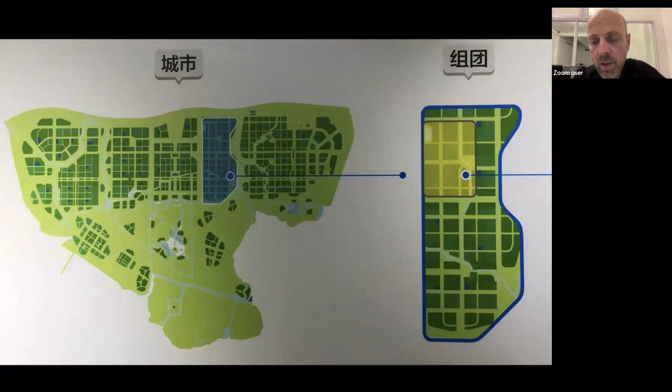And even though the context is so unique, the plans are not. This is a diagram of the master plan, and to me, it strikes me that it is similar to any modernist city we've seen over the last 80 to 100 years. A grid city with regular large roads in all directions, sometimes even 6 lanes.

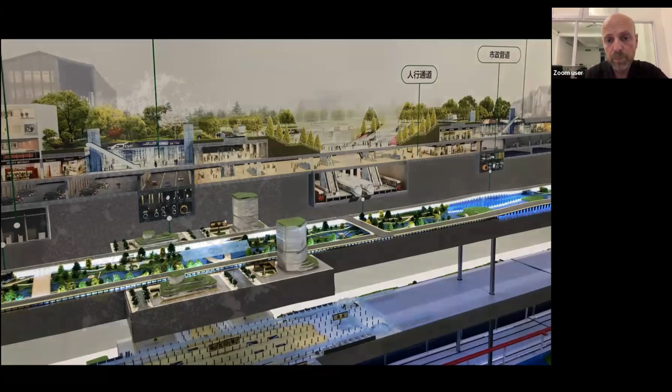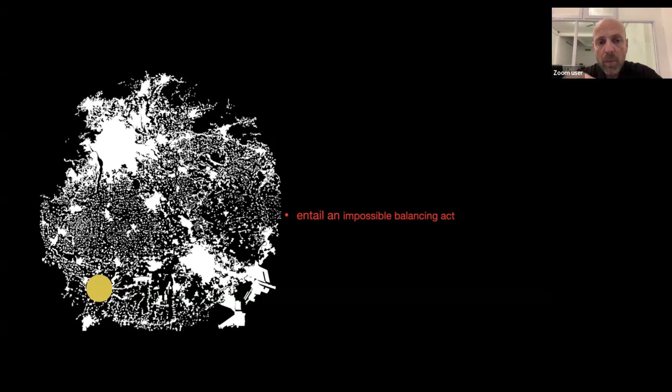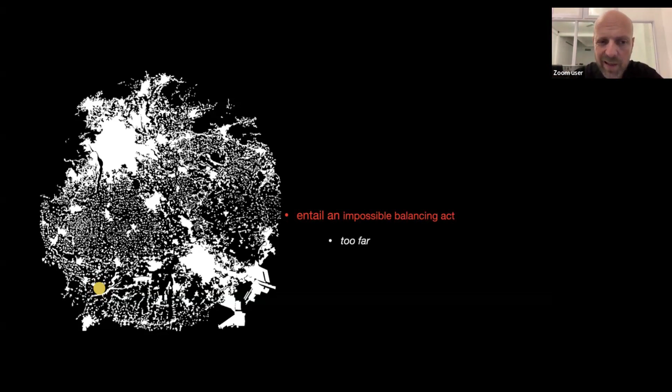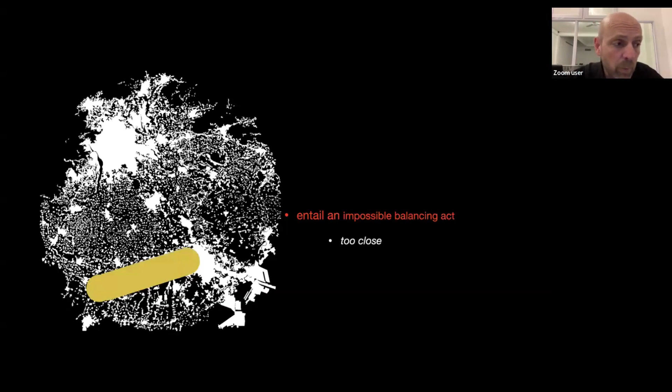If we go back and look at that dot and how it sits between these two mega cities, Beijing and Tianjin, it's almost impossible for us as planners to position that new dot, that new project, in a meaningful way. Either you're too far away from an existing economy, from an existing urban core, and your city is kind of withering away, which is currently the situation with Xiong'an. It's kind of lingering. Or you are too close to a mega city or a strong economic core, and invariably you're too successful, and your new town will grow towards that core and kind of blur with it.

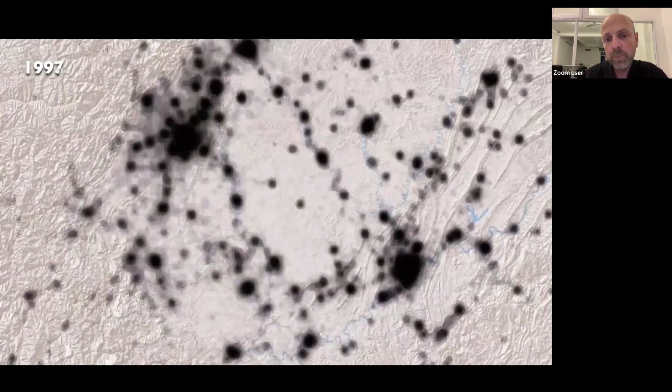And this is not theory, this is very much actual practice. If we look at two cities from the 90s, Chongqing and Chengdu, and we glide through their development over the last 20 years, we see that despite all the planning, despite all the very detailed rubber-stamped, officially designed master plans, they have ignored all those schemes and followed their own urban gravity to grow towards each other. In my terminology, this is market-driven unintentional development, or MUD. That means we don't really have the means to control our own urban products.

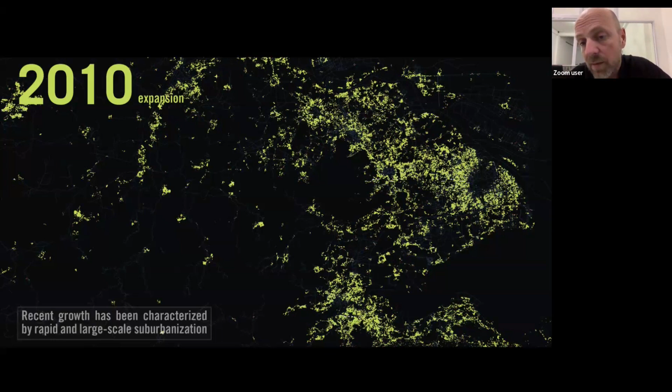In China, while these projects are being realized, suburbia unfolded. This is all the new urban tissue that was created, planned in those short 10 years. You can see that, again, there's no real coherence, there's no real structure to this, there's no master plan. And the same goes for other cities.

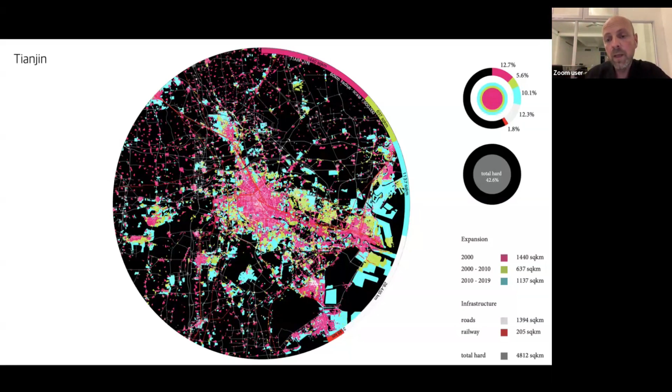We can quickly glide through them. This is Tianjin, where pink is in 2000, yellow is in 2010, the footprint, and blue is the new footprint by 2020. So the process changes, but exurbanization or suburbanization or fragments kind of launched to the far reaches of this urban system continue to grow. The same for Beijing, the same for Wuhan, very much happening between 2010 and 2020, all in blue.

So if we want to control that, or if we want to outplan that process, there's a number of standard models at our disposal. And the new town is scenario one. I hope that these diagrams indicate it wouldn't be particularly effective. The new town planning, say 4 dots that absorb the amount of growth that is projected, wouldn't stop the expansion of the existing core. Maybe somewhat more effective is a sort of a ring close to the center with limited driving, limited infrastructure. Better yet, along that logic, is a sort of offset, a perimeter growth that would take the existing footprint and just offset it a little bit all along its length.

In reality, none of these three scenarios would unfold. What would happen most likely is what we saw in the previous diagrams, that the city kind of expands along its own accord. So we don't know how to plan them, and we don't really know what is a good city.

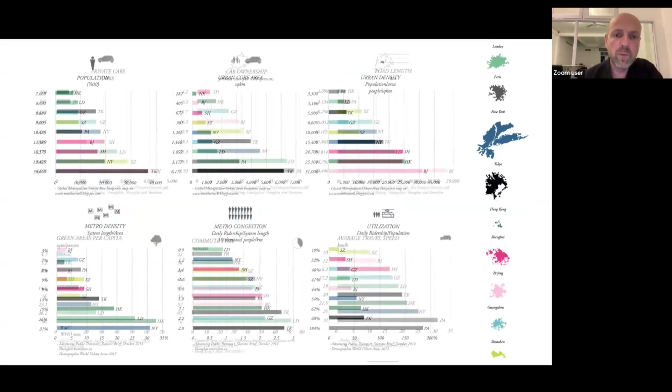I'm biased, but I do really like Hong Kong. Weirdly enough, the cities that I also really like are scoring very poorly in this diagram. For instance, Beijing, my favorite city.

It's also a terrible urban system. So performance and experience are at odds with one another. We can make a system that performs well, but it might not be the place where you want to live or work, and vice versa.

So even though planners don't know what is a good city or how to design and plan it, increasingly it seems that leaders around the world do think they know how it's done.

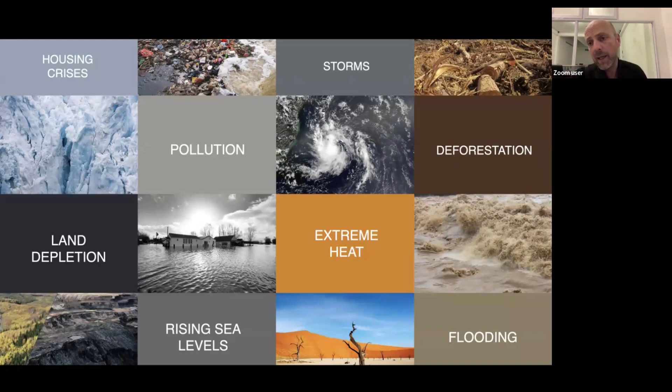Maybe that green space will, as we start designing, deter us from making a compact city. For now, we are still following the big dream of all these eco-cities, which somehow carry the burden to deal with all these global threats - global warming, deforestation, flooding, etc., but also just acute housing crises.

These types of global urgencies have introduced an excuse for many planners and policymakers to present these concept cities that don't really have the science to back their design. In fact, I would argue...

...that the world has changed so much that our initial planning models of cities with a center versus suburb do not thrive in a context that doesn't have much centrality. In short, the theories we rely on as planners fail within the world as it is now emerging.

And yet, this urbanism of urgency - these big threatening immediacies that we need to respond to - allow us to make increasingly ridiculous projects. The Line is a great example.

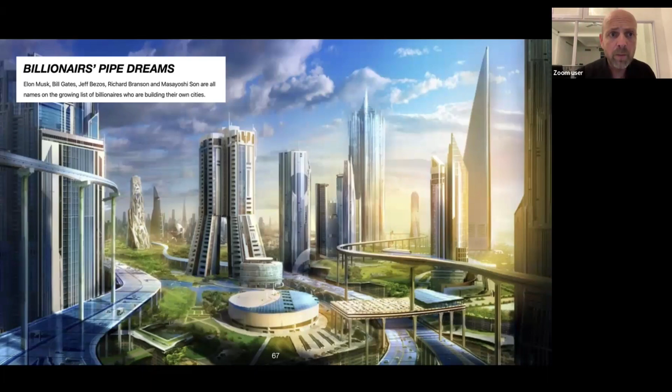But it seems that every billionaire and his uncle wants their own new eco-city, new planned-from-scratch city: Richard Branson, Bezos, Bill Gates, Elon Musk. It's become the next big thing.

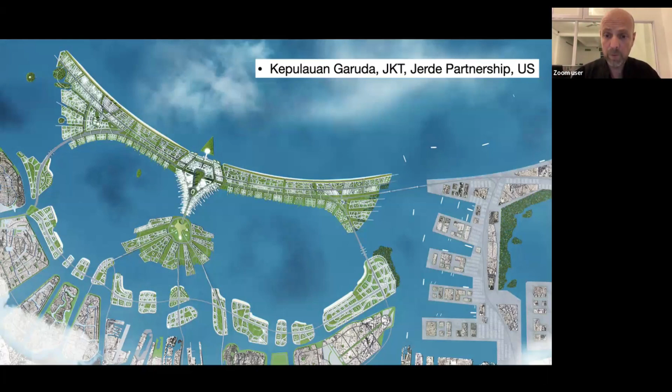Also locally here, we've had our share of attempts at planned-from-scratch new towns. This, I must admit, is also not just an American company, but an American-Dutch partnership.

We must admit to ourselves that the new town can be understood as simply being a blueprint projected on a greenfield. In the case of McKinsey, if you're building these hermetic, resilient environments, you really have to wonder, are you reaching...

...the people who are in need of rescuing the most? So the theory fails us, or rather this theory is no longer in touch with reality.

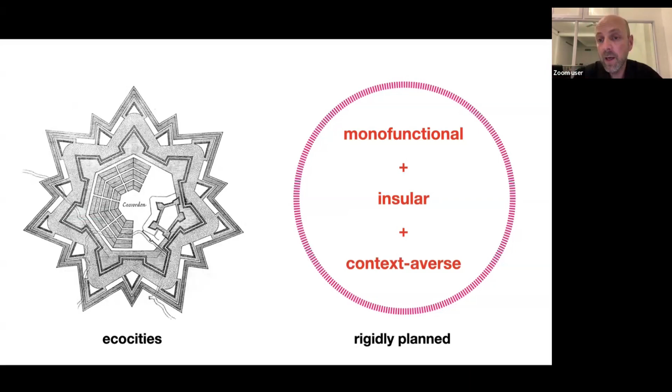They're kind of more like these, in this case on the left here, Renaissance vestiges that did one thing really well: protect us against the modern enemy of global exigencies, global warming, flooding, etc. Ultimately, they remain monofunctional. They do one thing pretty well. They're inward looking rather than outward looking. They're context-averse and rigid.

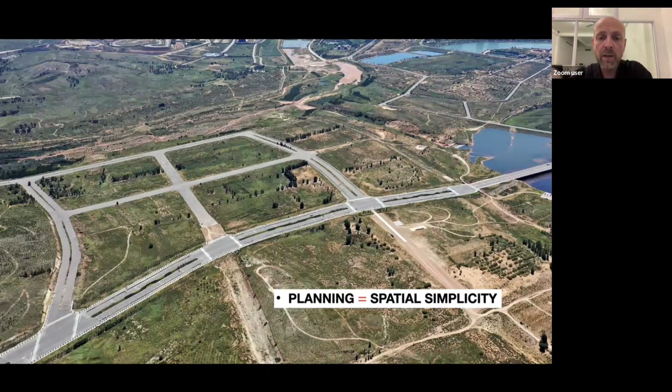And this is not theory. This is very much the way these cities are planned and built. This is near Ordos in the north of China, where you see how the grid is rolled out in big quadrants and then filled in with blocks. This is an efficient way of attracting funding from the central government, and it's an efficient way of attracting funding from local investors to build a project, if the road is already there. But it installs within the urban fabric an extreme spatial simplicity, as you can see.

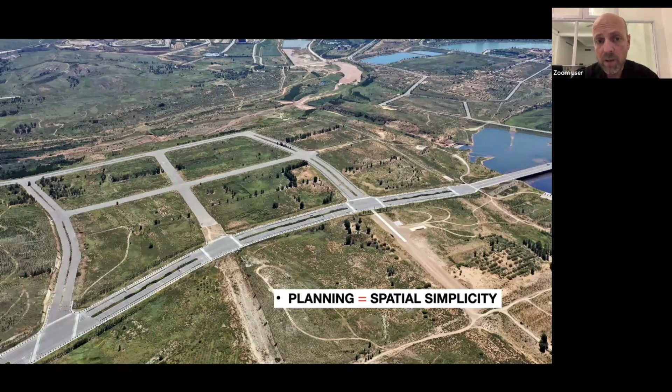In that type of framework, the smart city that you're designing, the eco-city that you're designing is really disguising an old urbanism. It is really still just big roads connecting in a grid.

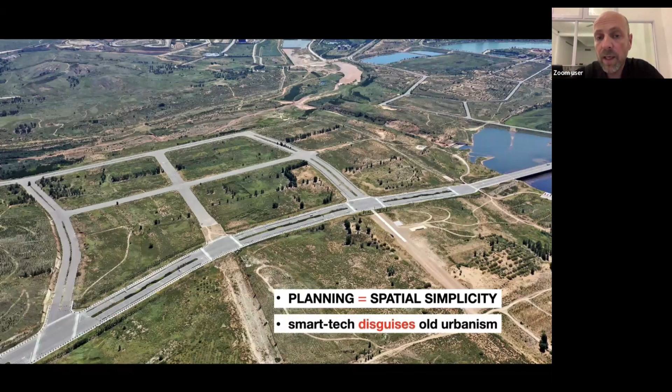So that's my little section A: no new cities. There are plenty more arguments to avoid them, but let's get to Nusantara.

I mentioned I don't think Nusantara is that blueprint projected on the greenfield. The first step is the greenfield. That's fairly obvious.

So you're projecting onto an empty, at least in terms of population density, an empty slate. Is that correct? Yes, but there are certain local realities. It's a territory with its own hydrology. In this case, on the right, you see all the different languages that are spoken. So there is a cultural context as well. So it's not a tabula rasa. In fact, it's not even a green field.

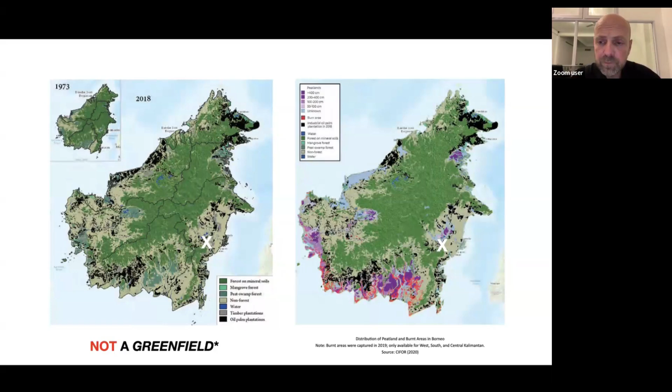This image, many of you will know it, is revealing the kind of gradual erosion of the natural landscape since, in this case, 1973 to today. The current context where Nusantara is built is not a tropical, diverse rainforest. It is actually what here is marked as non-forest, a monocrop of oil palm plantations and acacia trees. So it's not a green field because there is no forest.

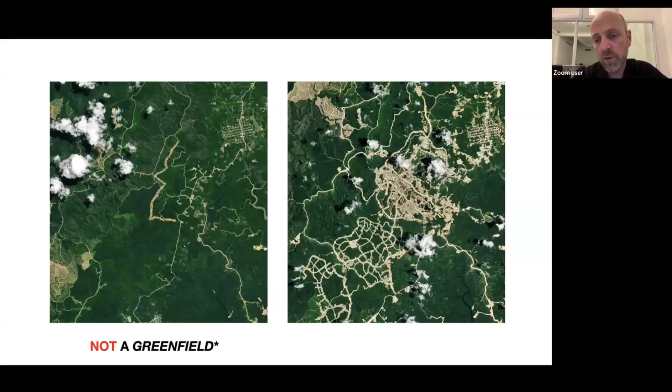It's also not a green field or tabula rasa because, most importantly, the phase 1-4 administrative center of Nusantara is already built. These are the roads that have been constructed. And Pak Sofian of Urban Plus will talk about this in the pre-last session in this series. So if you have an existing core, by definition, it cannot be a greenfield. We are planning against something that exists, building on top or from something that is already constructed.

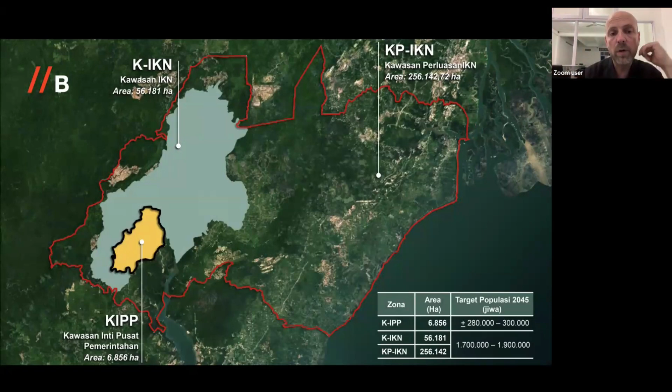That's distinctly more difficult. I would argue that the main reason it's not a blueprint is that our mission and the official mission for the future of IKN is to seed this idea of a forest city. In other words, for the next 20 years, we're going to expand, grow, and evolve from this yellow core where phase 1 is being constructed to something that occurs within this red outline, within this red border. Where is to be discussed. The goal, 2 million over 20 years, will not happen at once, will very much be a gradual process.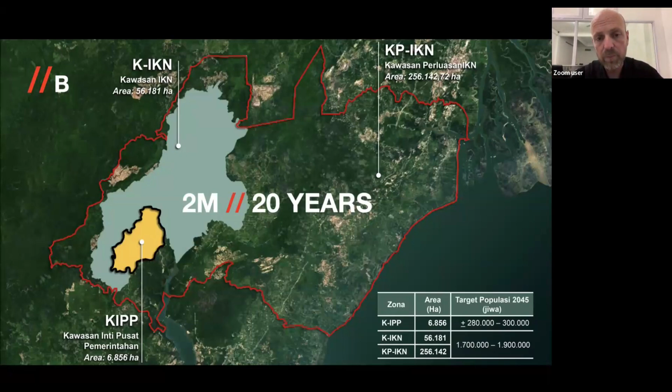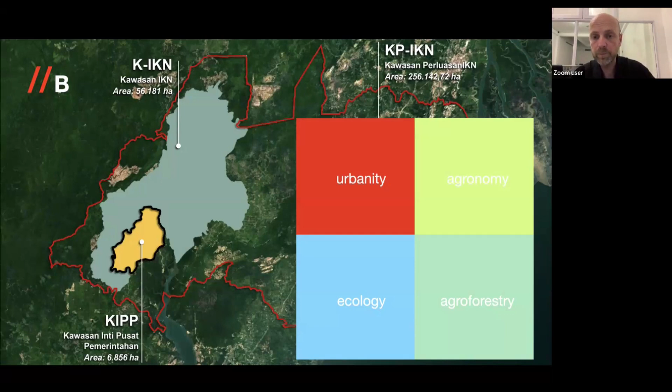And the program or the land use is also not of a usual blueprint city. In this very simplistic diagram, I try to indicate it is some sort of mixture between urban and non-urban, between urban, nature, and agronomy or agroforestry, some combination of red, green, and blue. This diagram is slightly more accurate. It is less prescriptive in a box. We're probably not going to see any boxes.

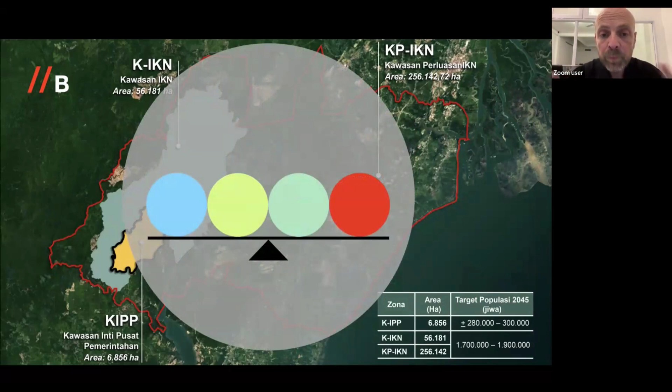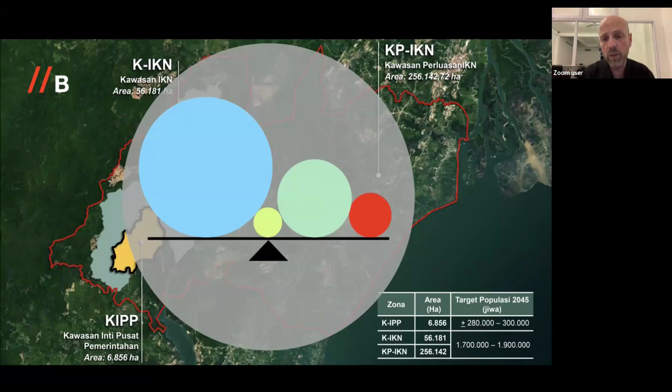It suggests that we can and we must acknowledge this entire area and somehow strategize how the correlations of these programs should occur and what their exact proportions will be. What we do know is that they happen simultaneously and that they have to have some sort of balance between them. So in that sense, it is a traditional city, not a planned from scratch eco-city. It is a city that must fulfill traditional needs.

It has to have a critical mass, a capacity to house. It has to ensure safety, basically resilience. It has to somehow incorporate its future resources in food, energy, water, building materials, etc., medicine. And ultimately, it has to be a place of social, cultural, and economic exchange. That's your basic definition of a city.

And this would be very difficult, but the context has changed quite dramatically. Unlike Chinese eco-cities, there is no economic pressure cooker anymore. It's going to be slow. It is not primarily funded by global investments, so it can be and must be somehow bottom up. It can be projected on a distant locale because the initial inhabitants will be students and officials, the two groups that allow themselves to be relocated with not too much impunity.

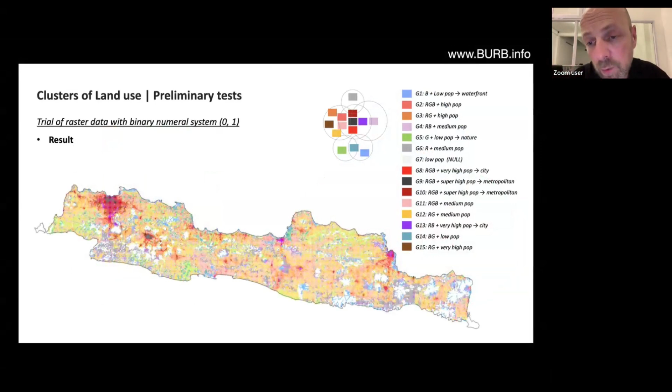But the beauty is, if we reduce that very complex environment, let's say the suburban landscape of Java, to only 3 colors, we can begin to grasp what's going on, and then we begin to strategize for larger areas. So using this tool, and I want to stress that you don't need GIS to do this. You can also still do it, as I used to my whole career, through manual labor and just mapping it the old-fashioned way. You can understand these systems and reduce them to these, let's say, cocktails of different programs.

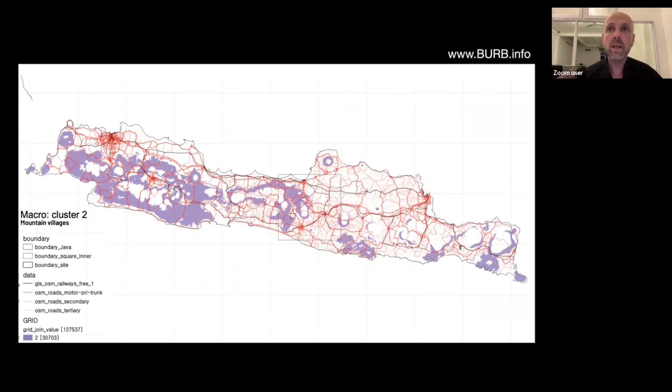If you have such a reduced set of landscape typologies, your future strategy can be implemented across very large areas. So suddenly, you have the means to work bottom up, where traditionally all our planning is top down, is centralized, is a blueprint. Now we can say, for instance, in this blue zone or this light gray zone or this orange zone, the spatial logics are probably similar. So if we have a solution that we develop locally, it could be replicated across this orange zone.

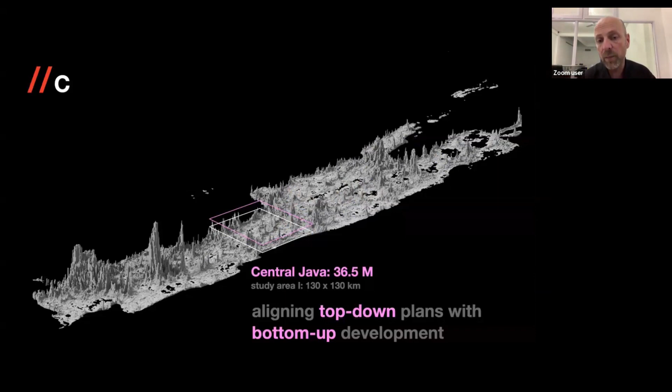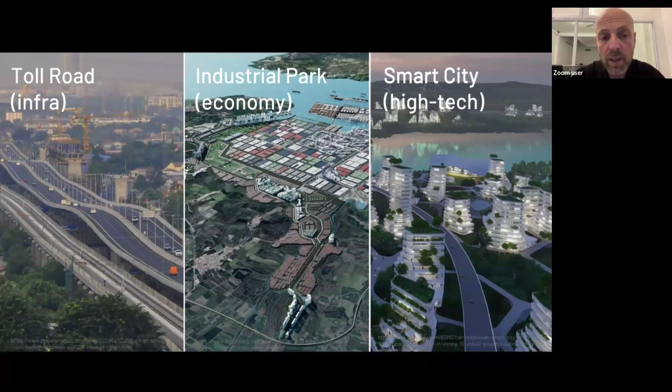Here you see some other ones for Java. Now we've applied that logic to Central Java. So here, the reality of top-down planning meeting bottom-up grassroots and informal development is very real and very tangible. This is the top-down reality. We need airports and seaports. We need toll roads to a certain degree. We need logistics centers, but they are superimposed onto a landscape that is very active itself, that has its own micro activities that follow an entirely different logic.

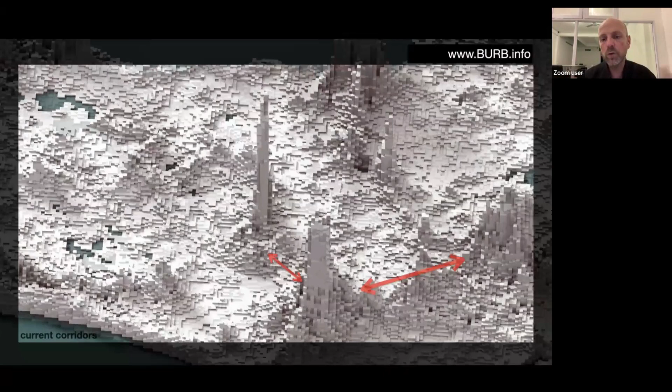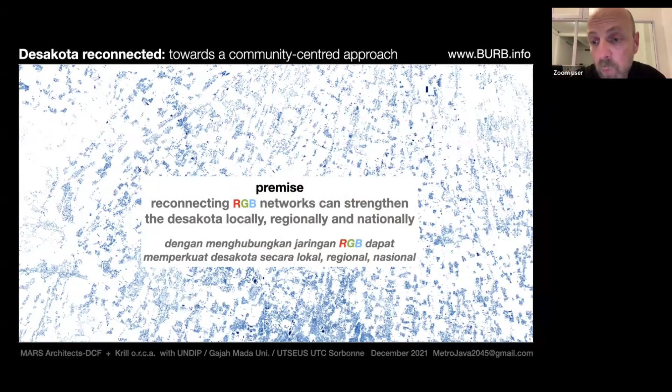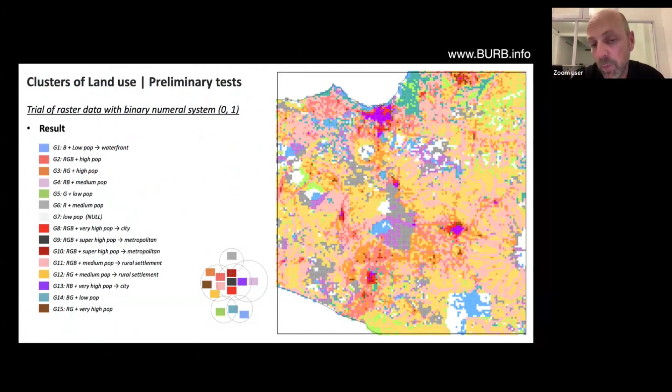So suddenly, these density spikes begin to respond to each other, grow towards each other, respond to new top-down planned items such as the new airport or the Borobudur as a new destination. So my premise is that using land use, we can make sense of that process and we can even guide that process. This is Central Java with our cluster map analyzed for a great number of different cocktails that we then reduce to only 15.

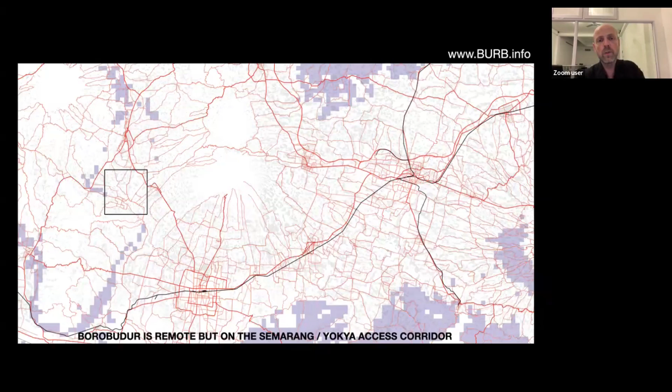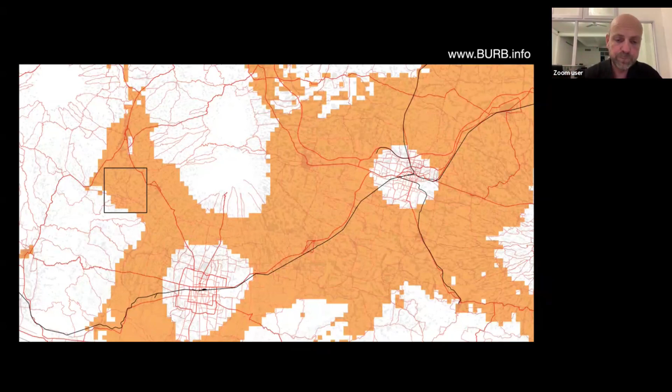Zooming in on one site here in that box, the Borobudur, we can see that if we had a spatial strategy for that one envelope, we could replicate it across this orange area because our analysis suggests that the land use is similar, the land systems are similar. So we've done that. And in my first case study, to back up my claim, I'd like to share this mapping of the Borobudur area. In the little black box here, the dot is the Borobudur. And we did extensive mapping, but I'll show only a few.

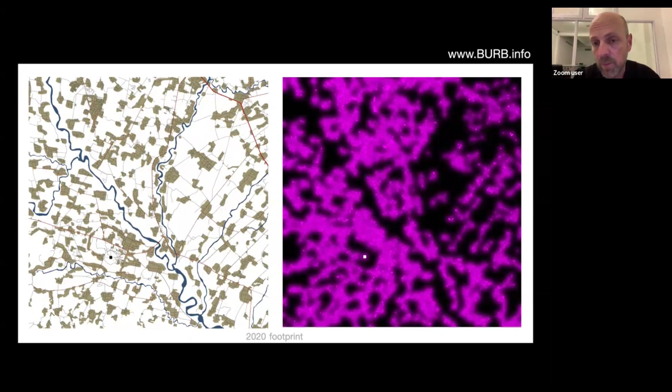We see that in this seemingly universal landscape, there are certain hierarchies. There are places that are probably growing faster than others. There are places that are more accessible and less accessible, for instance, either by car or by foot. So the traditional rural versus urban dichotomy that we as traditional planners used to rely on can be traced back even in this very intricate, seemingly universal system. The urban, accessible by car, the rural, by foot.

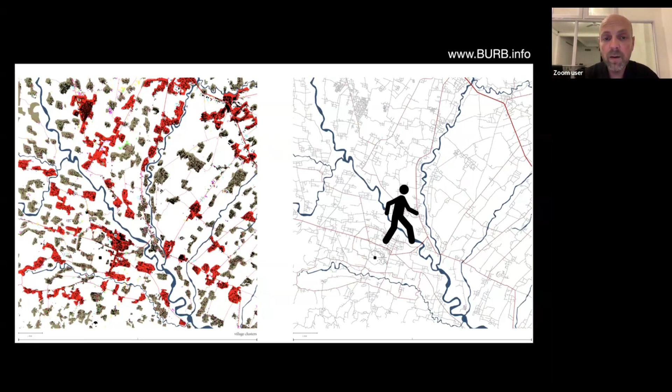According to that logic, we could begin to strategize a development scheme. In this case, we have red corridors where villages that are accessible by car become more urban and embrace urban activity and maybe industrialization, whereas the green bubbles that are accessible for pedestrians, bikes and scooters remain protected, remain local, remain green, and still are able to tap into those red zones. Here you see one of them. This is an actual village with its green corridors that are revived in order to allow people to walk from one village to the next without having to use, for instance, a highway.

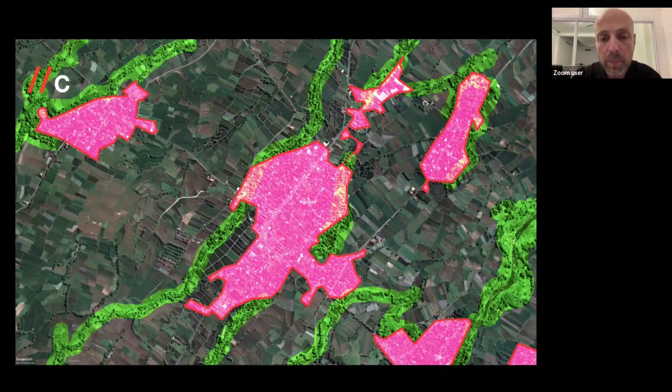So suddenly, what seemed to be a vast and almost incomprehensible fabric becomes much more human, more local, more understandable.

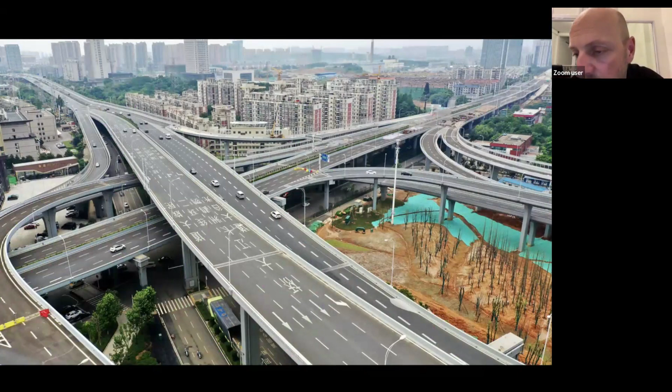Now, I hear you think, yeah, that's great, but new towns are the product of developers, and developers like cars because people like cars, and maybe this is all only viable in some rural context. Maybe that's a fair argument. I would like to suggest there are some alternatives.

But if we want to rid ourselves of the car, and in the second talk of this month, Lior and Barend Koolhaas will tap into urban mobility, we see that if we radically rethink the master plan of the city and introduce this evolutionary process, we could probably avoid our dependency on these very road-centered systems.

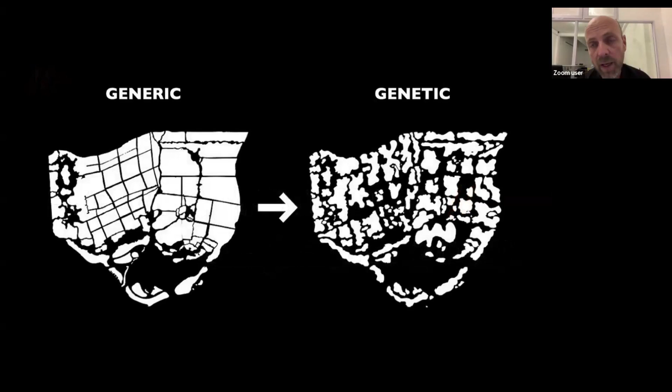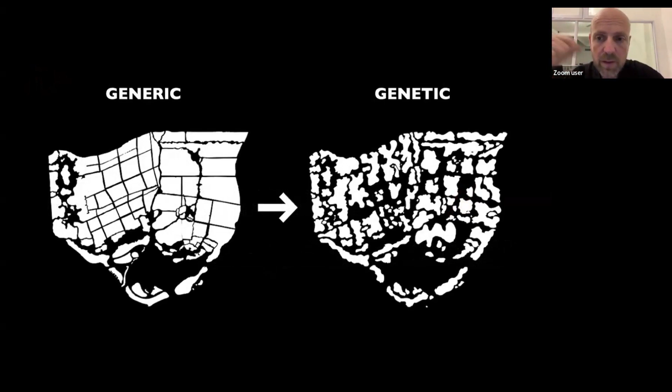So we were invited to design an alternative for Xiong'an, the city I showed you in the beginning next to Beijing, Tianjin. The original map on the left here, very traditional, very road-oriented, and yet supposedly a green city. We suggested that we couldn't really take that map and replace it for another map that we, as a single team, would then define top-down and say, that's our new ecosystem.

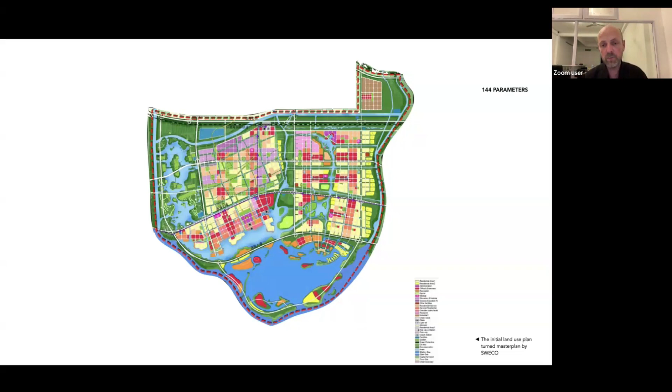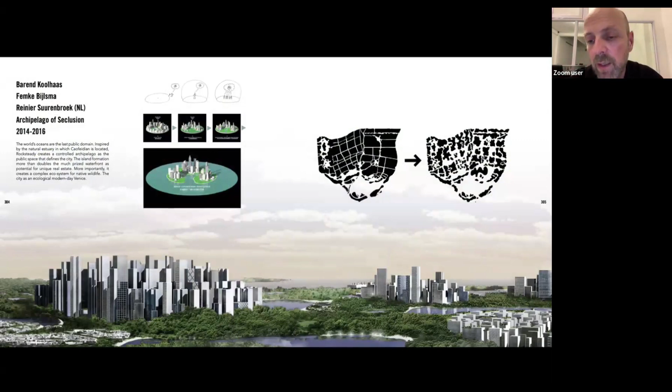We suggested that instead, we should redesign the planning process itself. So to install a sense of evolution, we install it within the planning process. To do that, we invited 9 other companies, very formidable ones, including Urbanus, BAU, ZUS from Holland, MAD from China, etc. Instead of asking them to each design one corner of that future city, as is common practice, we suggested they should design one after the other, passing the file along in the computer in 3D from one office after a few weeks of working on it to the next, etc.

So they all had very different ideas of what is an eco-city. That in itself is already kind of mind-boggling. There is no singular understanding. There is a plethora of ideas and aspirations of what the future of the eco-city should or could be. In this case, ZUS introduces a beautiful kind of landscape urbanism type solution of dikes and houses on those dikes, and even floating pontoons, etc.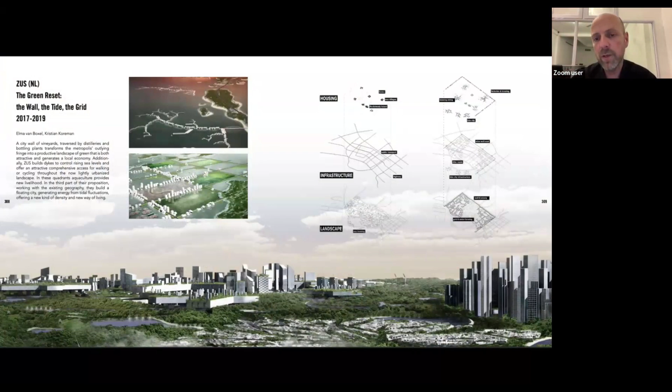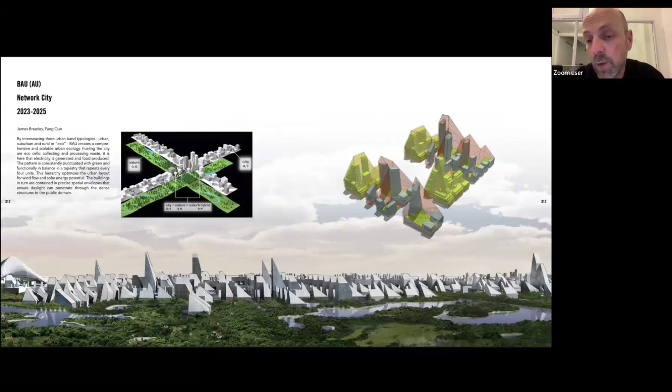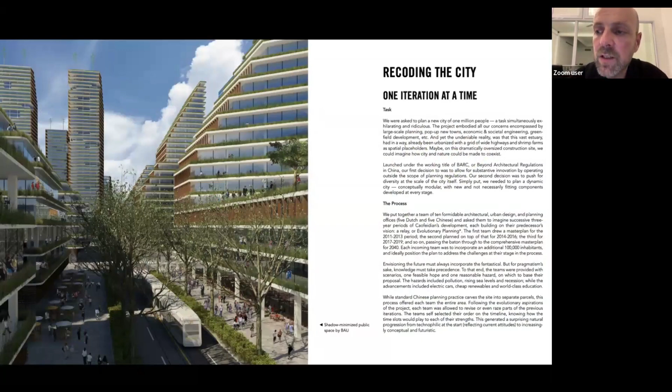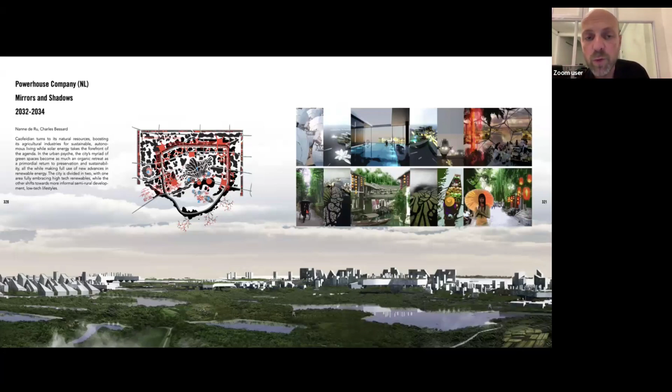So we have a range of designers working on top of each other, even deleting previous solutions or parts of designed areas, in a way replicating the growth of a real city, simulating the evolution of a city. That is a type of inherent complexity that you cannot design as a single team, not even the best in the world. So what you get is a number of really shifting directions of this evolving eco-city of Caofeidian as it in the computer grows from 2011 in 3-year increments to 2040.

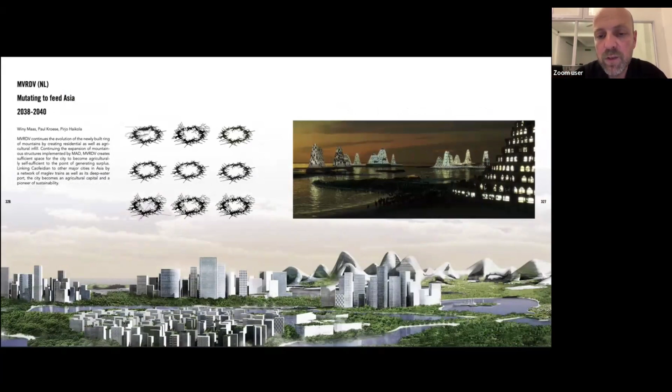In this case, towards the end, Ma Yansong, MAD, feels there is enough economic momentum to do a grand gesture, which then is undone by the final participant also taking part in this lecture series, MVRDV, who suggested, well, we need to be sustainable, we need to recycle that space and occupy those buildings. So what you see is a very rapid transition here. I'll click through it team by team.

It starts simple, then landscape urbanism kicks in, infrastructure, walking and biking come into play, new forms of housing, new neighborhoods that are organically growing, an entirely new energy system, a new center, CBD, if you will, and ultimately a city that, even though it's utopian, has enough to teach us about which of these ideas are in the future maybe desirable and maybe not. It allows us to make our mistakes that in the real city cannot be made because the city can't be undone. The city is not an empirical product.

I think this is probably my closing case study, or maybe pre-closing. I have a simple definition for myself what planning should entail and should be about. It's connecting people, connecting systems, and connecting space. That's it for me. In the case of the master plan for Mumbai, we came to discover that sometimes that is easier said than done, because the city you're dealing with has a hidden city within.

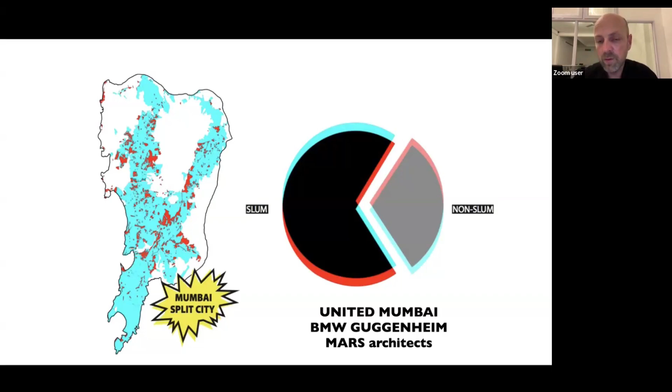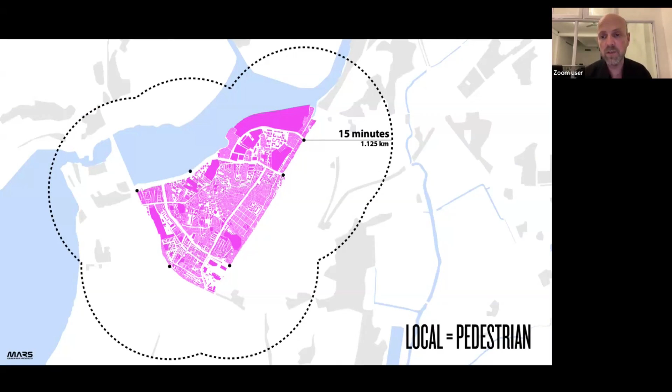So what do we do in that context in terms of reconnecting people, places, and systems? If we look at the largest of those informal settlements, and the most famous one, Dharavi, it's kind of locked in by infrastructure. Train tracks, roads, water, sewage. And yet, all that infrastructure makes these people have less access to the rest of the city instead of more.

It's so bad that it impedes their daily lives. There is a sort of time scarcity. They can't achieve all the things they need to do within one day because there's so much to traverse, so many tracks and pipelines and infrastructure to traverse to get to their destination. At the same time, all those informal settlements seem to impede on the regular formal city and their transportation needs.

We have a very rich, diverse ecosystem, the city, which is in many ways similar to the diverse, rich ecosystem of the forest we aim to achieve. And within that is this urban, scattered capital, an informal capital. So what we proposed in this scenario is rather than having a split city, we would have a twin city.

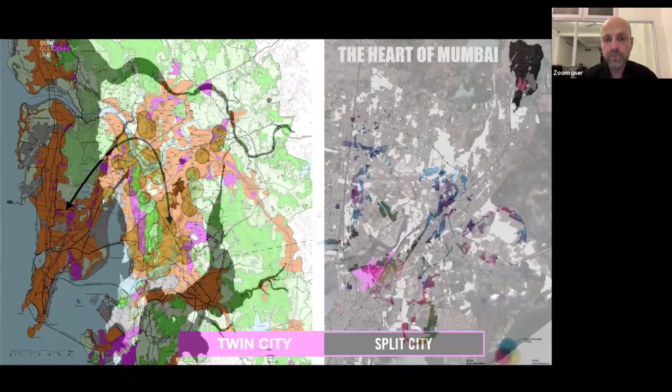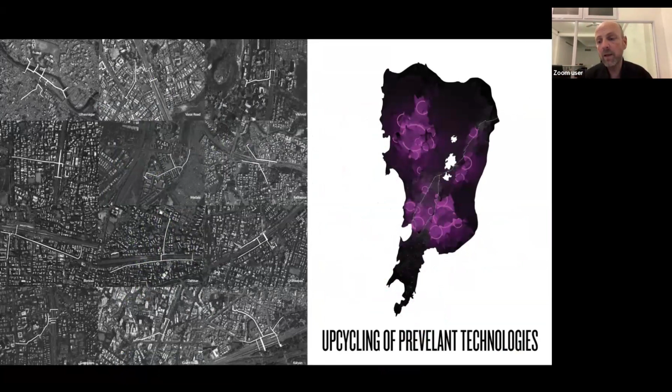So we mapped these informal settlements and started figuring out what the best options are to connect them and create an intricate network of pockets of settlements. And there's much infrastructure already in place. There are these skywalks that exist and can be utilized to create a new network. And they can be improved through design.

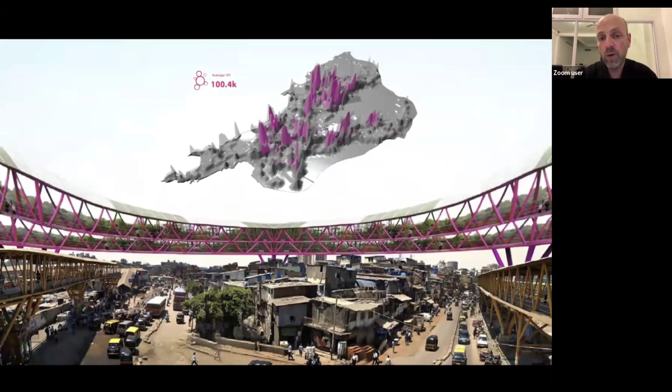And we can add new infrastructure, but this time not avoiding the slums and informal settlements, but actually providing access by reaching the densest areas in this informal map. Maybe even a little bit utopian, we can add new skyways, skywalks for pedestrians, but also for scooters and tuk-tuks and tricycles, etc.

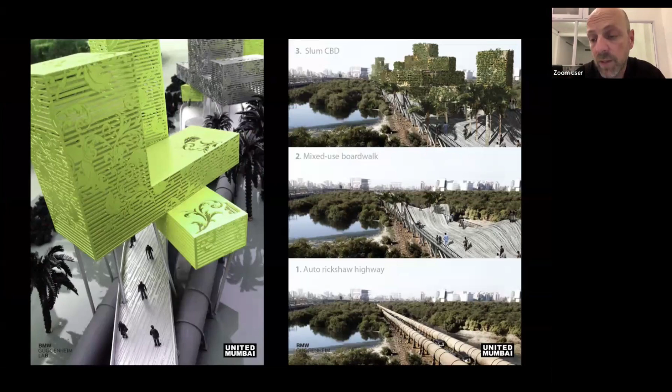More importantly, it's about utilizing the infrastructure and the ecology that is already there. And I believe in Nusantara, there is already a lot there. Here you see a new connection on a pipeline. Suddenly, all those isolated fragments of informal city are reconnected to form an actual connected tissue, to form a more formal counterpart to Mumbai's island city.